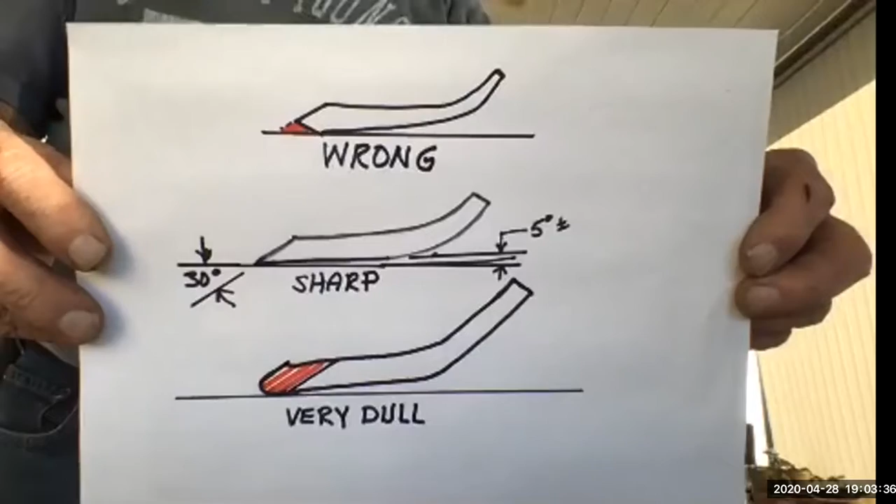Did we lose them? Yeah, there he is. I don't know if we can hear you. See my visual aid? It's backwards. It looked good, yeah, we can see it. I like that, but I'd still pay you to do it, Bill. Yeah.

So let's look at that for a second. So don't sharpen it on the underside, you're saying. Now, the one at the... how's that? Is that good? Yeah.

Did it freeze up? Yeah, it looks like it. They need utopia over there. Yes, they do.

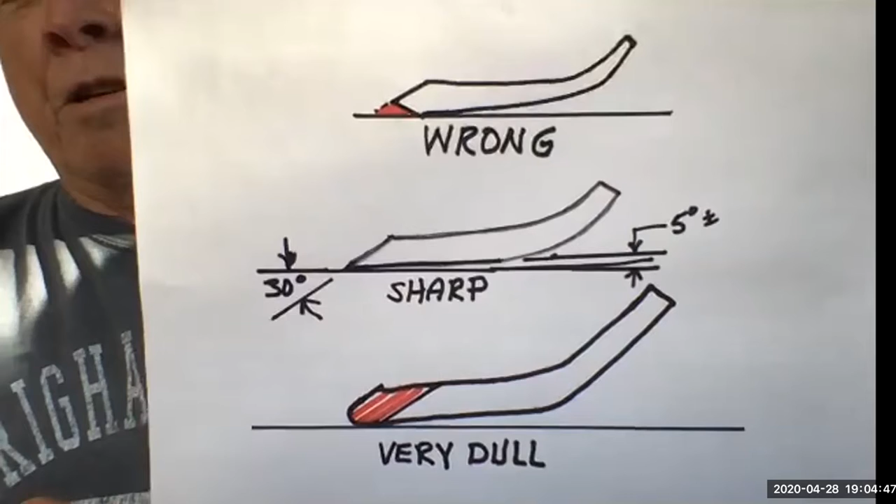Well, I'm going to say, anyone on the phone, I'm curious. Oh, we're back again, every time I say that, they come back. I need to say that every time. We got you, we can see and hear you.

Okay, get something to back this up, it keeps... Could you share that picture I just sent you, Benji? Do a screen share? Yep. Okay.

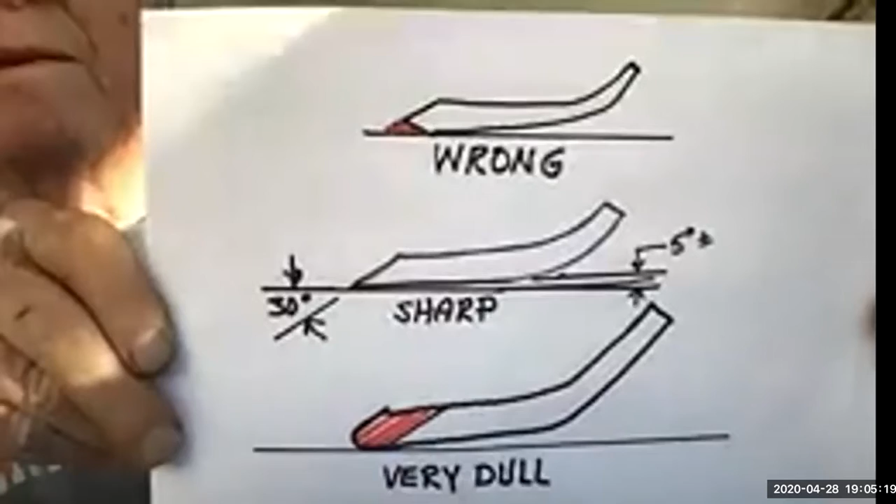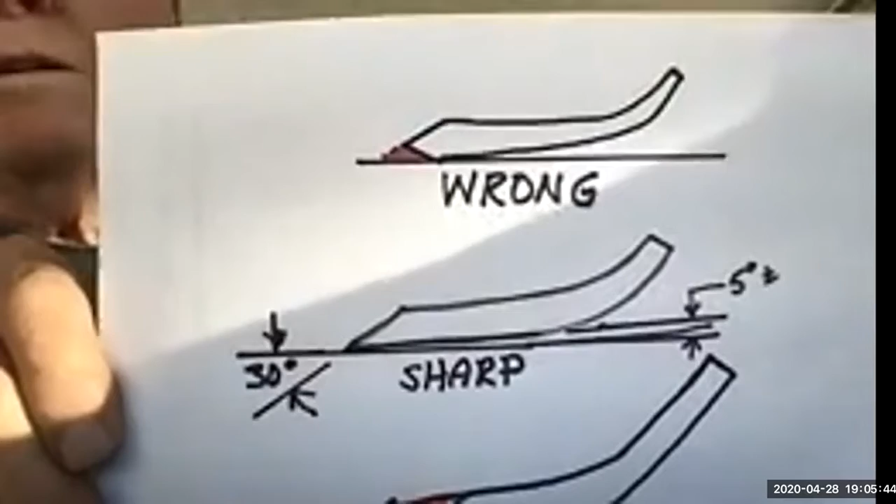The first one, where the red is, you don't want to sharpen that way, because although you'll end up with a sharp point, everything under the point is just going to whip your grass and shred the end of it. Okay, it won't shear it off cleanly.

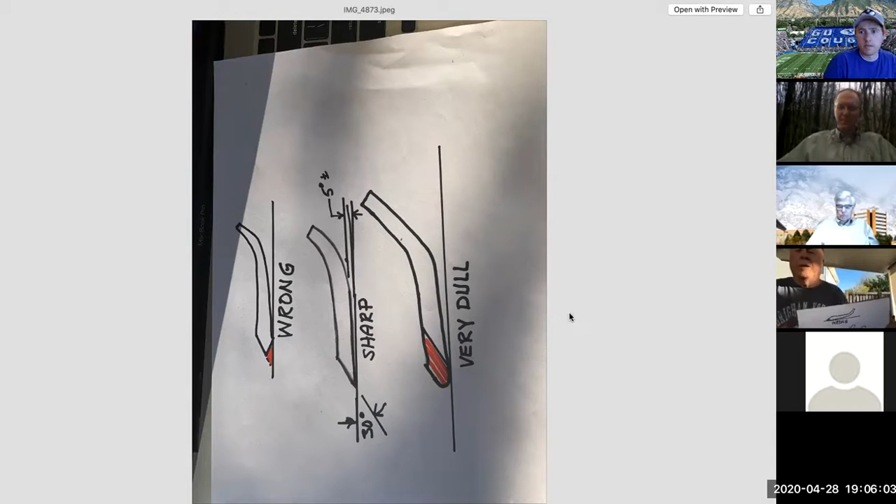Now the one in the middle, sure. You didn't? Nope, he's sharing it, Benji is. Picture text to them. Yeah, but it's 90 degrees off. You can go ahead and talk. Actually, we can, when you're holding it up, yeah, we can see it just fine, so that's good. Yeah.

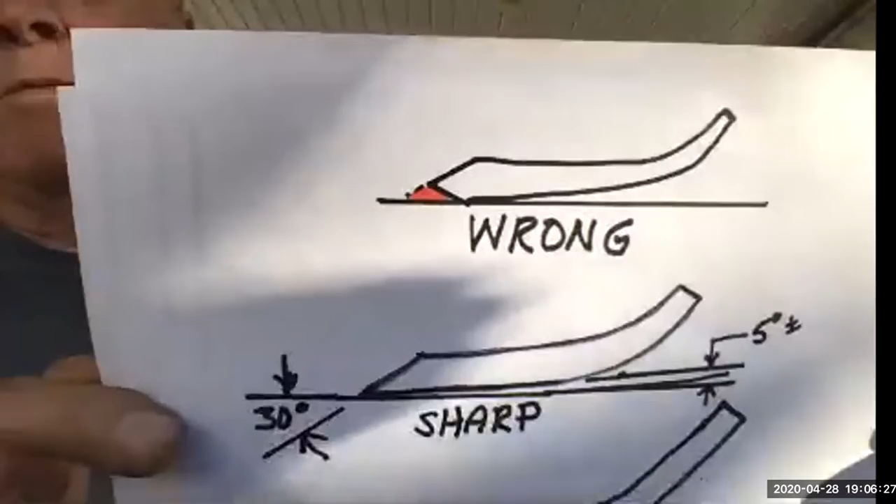Find the camera. Okay, the one in the middle is a sharp blade. Generally, they recommend about a 30-degree angle for normal lawn work, whatever. A lot of them now have an extra angle to start with, see the little part.

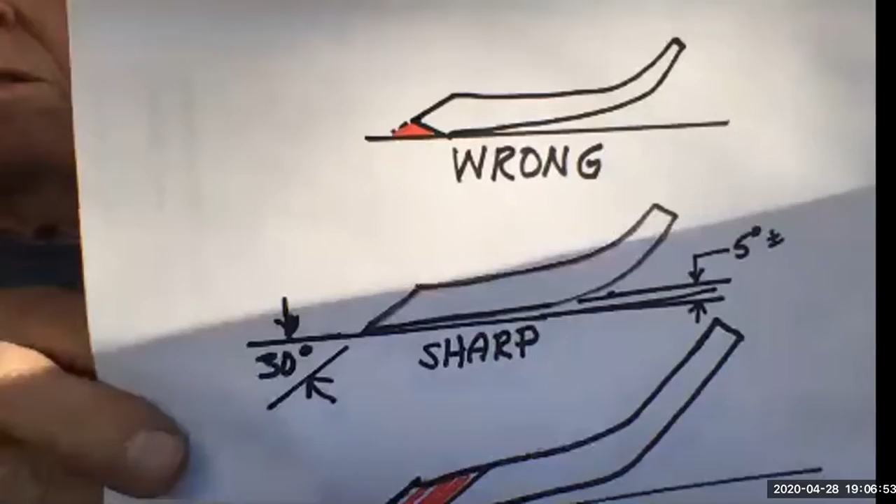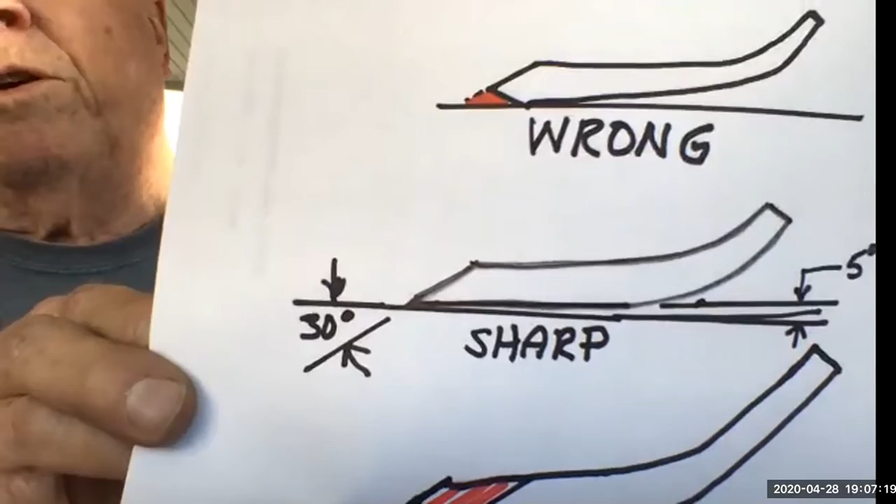You have one that's never been sharpened, and you've got to end up with a rounded blade, rounded edge. When you don't regularly sharpen it and keep that angle good, and now you want to fix it, look how much you have to grind off in order to get a sharp point again. I'll show you one here.

Now here's a fairly standard blade. I don't know if you can see it. Okay, and it's fairly flat. There's probably 50 or more shapes of blades that have been invented. Everybody has their own design for how they want the mower to cut. This is a fairly standard blade on your average Walmart lawnmower, just a flat blade like that, hardly any upturn on it at all.

This one weighs about 3 times as much as the other one. This is off a Snapper. You can see this right here, the upturn on it. I don't know if I can get it where you can, trying to show it against the background there. That's great. Yeah, we can see it. See how it is? And that...

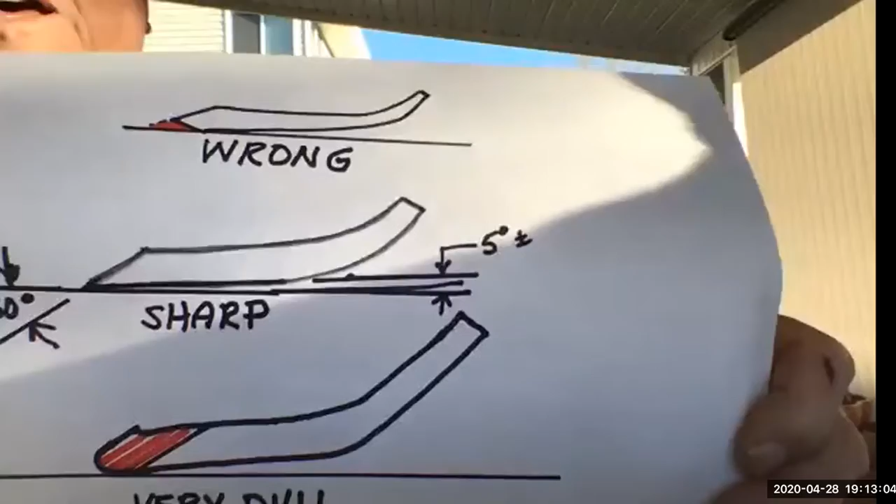But in order to sharpen this blade, you have to grind so much off that you lose some of the longevity of the blade. Does that make sense? In other words, in order to get this bad edge back to a good sharp edge, you got to grind and grind and grind. Like on this, like on my at the bottom there. See the one at the bottom? All that red has to come off before you get all the way to a sharp edge. That makes sense? Yeah, so what point does it make sense to just get a new blade?

Well, depends on how much money you have. I just keep sharpening it, but I have some. Now this one here is an example. This is a very used blade, and so on the other end I sharpened it. I don't know if you can see... Okay, this edge now is like a razor. And that took me with my machine about 10 passes in order to get rid of all that radius.

Why don't you mute yourself when you're not talking? ...on there.

I try not to charge a lot of people. This is more of a hobby. But if you want to pull your blade off and clean it good so it looks clean like this, and not clumps of grass all over it, both sides, up and down, it's like $5. If I have to clean it, then I generally charge $10. That's what the shops around here charge.